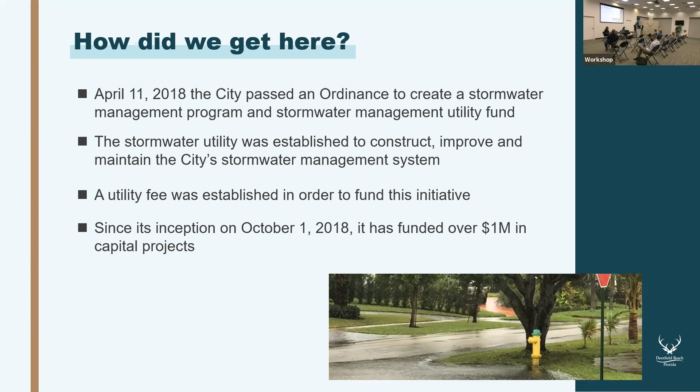The reason that we need a stormwater master plan is just like for any other venture, you need to be able to plan so that you know where you're going. Stormwater infrastructure is complicated. The city of Deerfield Beach has been here a while. So in order to properly plan for the future, make sure that we are maintaining everything the way that it needs to be maintained, prioritize projects for the future, making sure that we have that plan in place and being able to identify those projects is critically important.

There are certain regulations and requirements that the city has to meet as well as part of the stormwater management program, including what's known as a municipal separate storm sewer system. The city is required to maintain a certain amount of its stormwater infrastructure each year, as well as to maintain a specific level of service. That is, it needs to be able to service a certain amount of stormwater and process a certain volume.

In addition, the city of Deerfield Beach participates in the community rating system through the National Flood Insurance Program. The more benefits that the stormwater management system provides, the greater the discount on flood insurance premiums that the residents see. So that's an important piece of this as well. And finally, we want to be able to prioritize the funding available to make sure that we're getting the best bang for our buck.

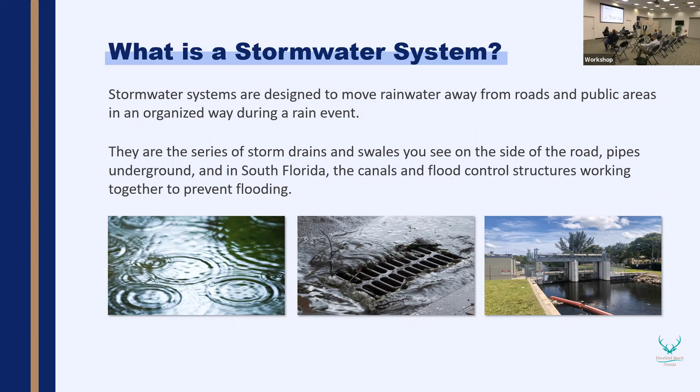So to talk about a stormwater system, it's generally that combination of catch basins, pipes, pumps, canals, outfalls, all of the different elements that you'll see along the side of the road, all of the different water containment structures that work together to help prevent flooding. The stormwater program is really focused on two specific areas. One is flood management and one is water quality improvement. Flood management, as is in the name, is about managing floods and making sure that roads are generally clear for vehicles to be able to pass.

And part of the reason that we're looking at flood management is we want to get the best bang for the buck. So we want to identify what the most cost-effective improvements might be and how we can continue protection of community assets through these investments. From a water quality improvement standpoint, we're targeting the management of our water bodies and identifying green infrastructure opportunities to make sure that all the water that's being diverted from the roadways gets as many contaminants removed as we can, and meets the criteria that we're required to meet per Florida Department of Environmental Protection and the EPA requirements.

Some of the things that we've looked at as part of the stormwater study include all of these different factors that play into the overall model and the behavior that we expect moving forward. Things like sea level rise and topography, the volume of rainfall that we might be expecting, how the land is actually used, whether or not it's pervious or impervious. Obviously, a park does a lot better job at containing water and allowing it to drain than a parking lot will. We'll look at water quality issues. We'll talk about some of the regulations and the environmental impacts that needed to be considered.

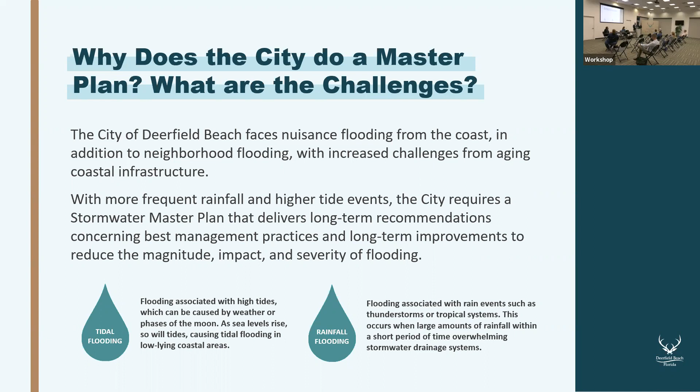Thanks, Michael. A lot of what the plan's about is trying to go from reactive to proactive. In order to have a plan, like a roadmap to the future, knowing what the city has to do to meet its responsibilities for managing stormwater, but also pushing improvements and fixes and addressing some of these issues. So as we get into the master plan, it's really this opportunity to look at the overall stormwater system, but look at its past, present, and future as well. What has happened in the past? Where are some of the issues in the city? What's going on right now that we can assess, but then also look to the future. How can we make things better and work towards better stormwater management in the future?

So this is an evaluation of all the issues related to stormwater. Flooding is the big one people talk about, people see. Water quality, what's going to happen in the future is also important. Since Deerfield Beach drains to the coast, the Hillsboro, Intracoastal, the sea level rise projections are a concern as well. That's an example of what may happen in the future that needs to be planned for. But where this all goes is identifying projects, actions or programmatic recommendations that can all be put into what we call a capital improvement program to provide that roadmap moving forward for the city. So I'm going to spend some time briefly touching all the major elements and giving you a sense for what went into it, the information that we're able to gather and base our recommendations on.

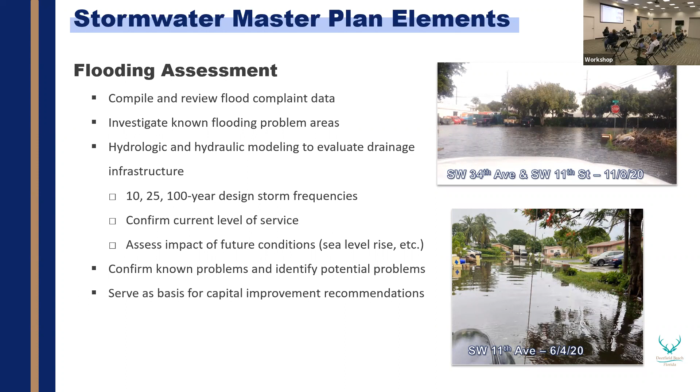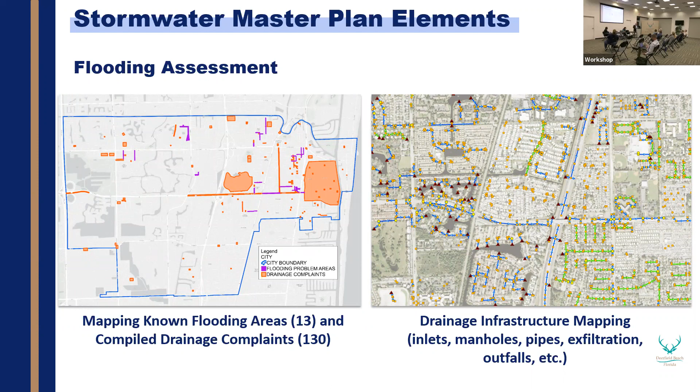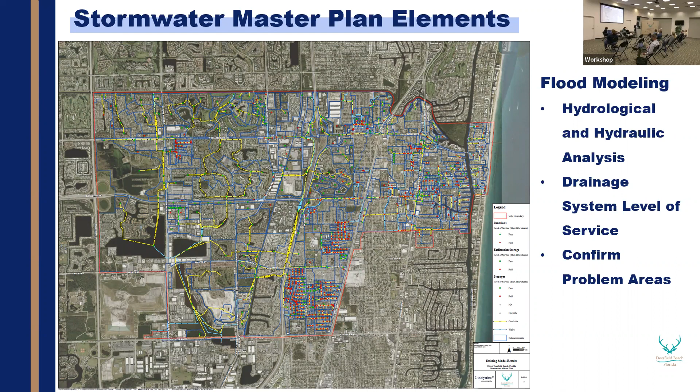Now, as we mentioned, we did this model simulation that's simulating a lot of the inlets and the primary drainage structures, the canals and the lakes within the city and how well they work and how effective they are, in many cases, at getting the water out to the outfalls. As you know, most of the city drains either to the Hillsboro River or the Intracoastal. So this is kind of what it looks like again, a lot of lines and little dots. But we have on this next slide a bit of a zoom in to the District 4 area.

And what we did was we tried to provide some good assessment in these maps of infrastructure that clearly tell a story. And a lot of times we depict this as just boiling it down to dots, green dots and red dots. Green dots mean the infrastructure appears to be meeting its level of service, whereas red dots indicate it appears to not be meeting its level of service. So in some of the areas of District 4, particularly in the Deer Run area, you'll see a concentration of red dots. Those are areas that, based on our analysis, confirmed some of the flooding problems and complaints that we had received. And there's some other little areas.

Not always indicating that there is a problem today, but could be leading to a problem down the road. So even if there's not observed flooding in some of these locations, it's an area to look out for in the future. And if things come to pass, the city knows about it and is able to plan ahead.

Another element aside from flooding is water quality assessment. As rainfall falls on the ground, it picks up a lot of pollutants, oils and metals and greases from the roadways, sometimes nutrients from some areas. And these wash into the storm inlets and they can get into the receiving waters. And so how stormwater may impact water quality in the receiving waters is a concern as well. So during the master plan, this is an effort to holistically look at the city, look at some areas where some stormwater quality issues may be present now or in the future.

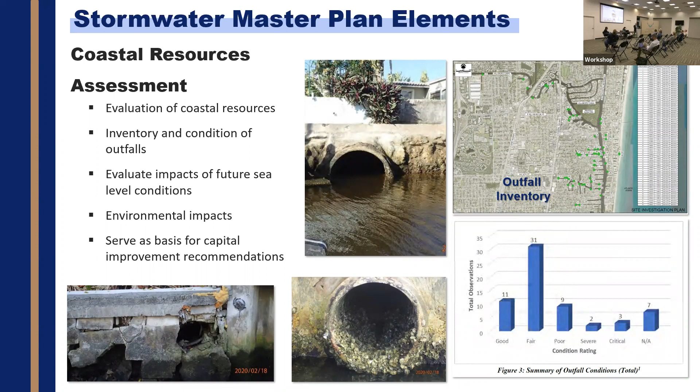Now, we talk a lot of infrastructure and water quality, but a couple other elements that we looked at in the master plan as well really help the city plan for the future. One is a regulatory compliance review. This is an opportunity to look into the comprehensive plan, the local code, the flooding code, and look to see if things are up to date with regard to stormwater management and best representing what the city's needs are moving forward. So we look at that and can provide recommendations for enhancements.

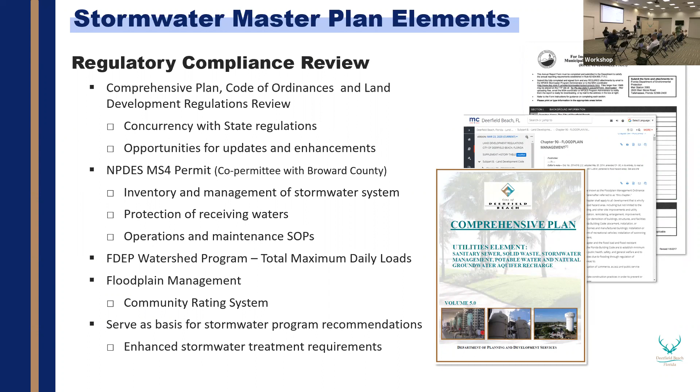We also look at that state NPDES permit that Michael mentioned, which is a requirement of the city to manage its stormwater program in a responsible way. So again, we can look through: are there procedures or enhancements that we've seen through our experience that might be good recommendations to the city? But there's also some water quality regulations. There's floodplain management, and all these can get rolled into the basis of providing some recommendations, and again, some ideas for moving forward with the program to better comply with the needed regulatory issues.

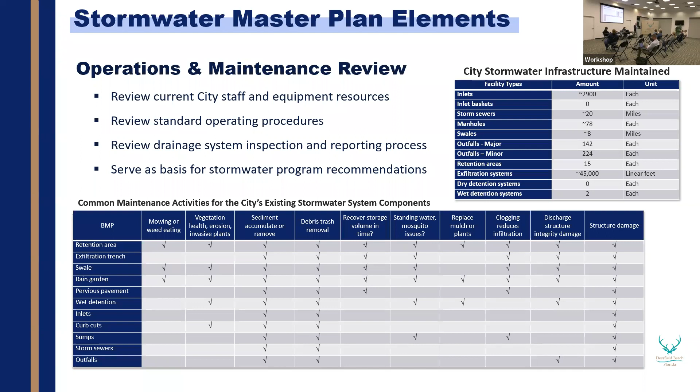So another thing we look at is how well is the city doing in that regard, and are there some recommendations for enhancement, possibly doing some additional things a different way to help the city, again, be proactive in the management of the stormwater system.

So those main 5 elements kind of work themselves together, as I mentioned, into a roadmap, a capital project program. And now this is a list where we pulled together all the recommendations for the various different areas of the master plan, and came together with a list of needs moving forward. And so this table shows flooding projects, shows water quality projects, but also shows some studies, some areas that maybe need to be looked into a little bit deeper. But all told, this is a program of projects that's just a little under $19 million. And so the challenge here is knowing what to do, how to prioritize it, and put it into a program so that the city can go about implementing things in a logical order.

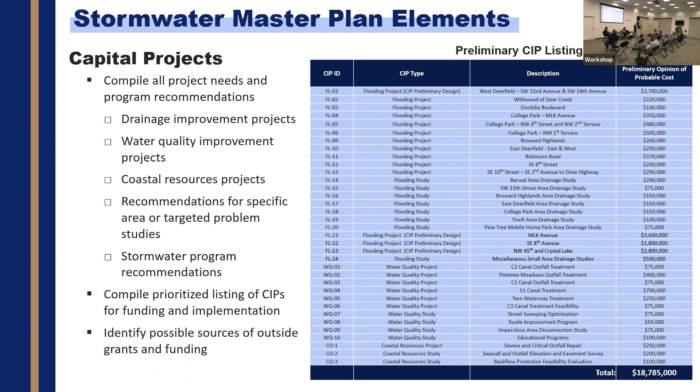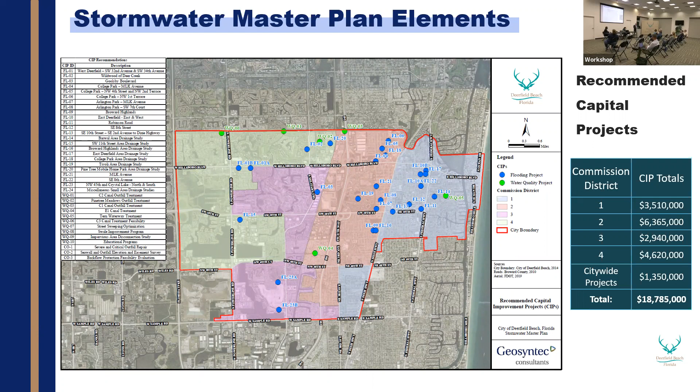The breakdown of that nearly 19 million by district is shown in the table on the right. In District 4, you see about $4.6 million there. There's also some citywide projects that provide benefit to the whole city, and those are enumerated in that table as well. So that gives you a sense of the amount of needs that were identified.

Now, what we do is then answer the question of how are these prioritized? What goes first? That's a lot of money, a lot to spend to improve stormwater. So we put together a 10-year program that puts all these projects together in a priority order and gives the city, again, that roadmap for moving forward. So for example, the flooding projects are prioritized, water quality, the coastal resources, and where this money would be programmed. And we'll say that District 4, the West Deerfield or the Deer Run area, was the top priority project that was identified to hit first. And I'll now shift to talk about that a little bit.

As Priscilla mentioned, the city received FEMA Flood Mitigation Grant funding. That was an opportunity to, beyond what the scope of the master plan is, take 4 priority projects, 1 per district, the next step further into the preliminary design. So in other words, start to get ideas and the improvements down in some plans to be able to flesh them out better as far as the improvements. Again, then be even more attractive to the city trying to bring in funding to help pay for them.

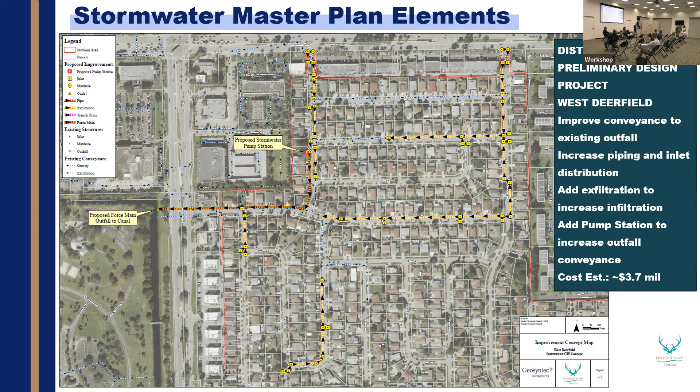If you don't mind going back to our priority list. Of these projects, West Deerfield was identified as the top candidate. As you're aware, the city has received some American Rescue Plan funding, so that is under consideration to see if those funds may be expended towards this project. That's something the city manager and the commission will be evaluating in addition to the numerous other projects and priorities the city has. But this is a top priority for the city. This and Southeast 8th Avenue were identified as the two areas in the city that need a quick response.

So what I can tell you is since the November meeting, we've received viable potential funds that can be used for the future construction of this project. From 30%, we need to do a full 100% construction document to get permitting. The permitting goes through multiple agencies. After we get the permitting, we would need to go through our standard procurement process, especially for a project of this magnitude, to get it competitively bid. And then we would get into construction.

Construction of this magnitude could take upwards of a year or more, especially because it's in a residential area. So essentially what I'm telling you is we're about 2 years out from you seeing true relief from these flood conditions, okay? But it is a top priority for the city, and it is something they are putting funds towards in the near future.

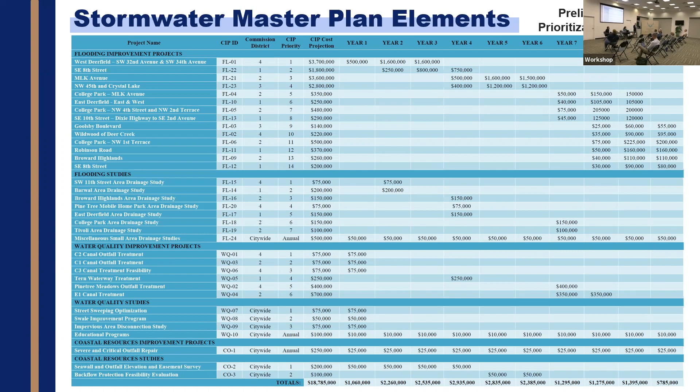To the rescue. Just to elaborate on Priscilla's point, the city manager and I have identified not only Deer Run, but Southeast 8th Ave as the two most critical areas in the city. And semi-recently, the city manager, when we were going to have a rain event, was proactive and had the response team on call. They were ready to go.

It turns out we didn't get the rain that was anticipated, but the response team was ready to go to Deer Run and Southeast 8th Ave because those are the two most critical areas. So we've learned our lesson from before, and we're prepared for the next time. So in that event, while we're preparing and getting this plan put in place, the city does have short-term measures to help that community as well.

Thank you. Hi, I'm Denise Bogner. I have a single family home in Waterford Homes. I was telling Commissioner, coming home Thursday afternoon, I was in the Cove East. There was no rain at all. As I started heading home, it was raining really heavy. I turned from Southwest 10th Street onto Military Trail in front of the Publix shopping center area there, and it was completely flooded.

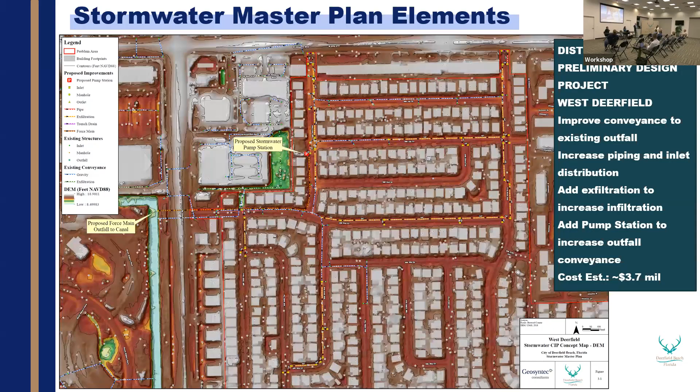Now, my concern is, is that District 4 or District 3? Because when you get over into that crazy area between Century Village and then going down Military Trail to the townhomes and stuff like that, do you know which it would be? Commissioner. This is your geography lesson for the night, but you were coming westbound on Southwest 10th Street and then turned left southbound on Military Trail.

So at that intersection, the southwest corner is District 4. And as you continue south on Military Trail, it continues to be District 4 until Green Road on the west side. The east side, all the townhomes and apartments, that is District 3. Okay, so I guess it's your district. Yeah. Publix is my district, yes. And then that first street coming into our subdivision, going over to Penny's house, that was flooded also. That's all District 4 as well, correct?

Yeah, and now Southwest 10th Street, as you're aware, is a project that is coming. That takes care of the drainage issues that you're seeing at the intersection of Southwest 10th and Military; those improvements will take care of some of those issues in that area.

Yeah, and I was looking to see if we had a red dot there, but I'm not seeing one in that vicinity. Yeah, your maps are hard to read, guys. Yeah, Southwest 10th Street is notorious for quite a few flooding issues. Once you come off of the overpass and you come in near that shopping plaza, that area notoriously is a flooded area. But with the future improvements with 10th Street, they will be required to mitigate for stormwater and ensure that there's no future flooding.

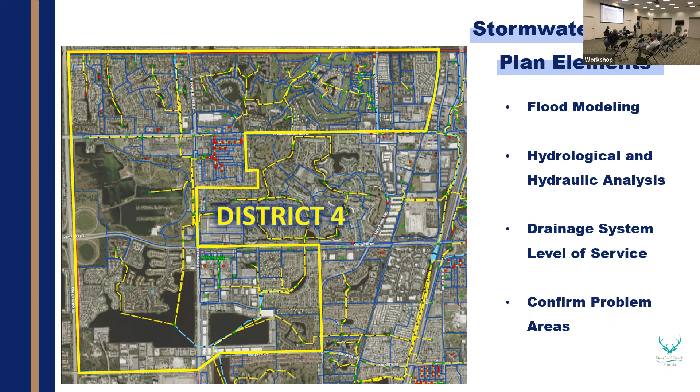Commissioner, do you want to say anything? Oh, put you on the spot. Giving the politician the microphone always is a bad idea.

So, to the residents' point, you remember with Southwest 10th Street the comment cards that they're always asking for at the public meetings. This is the same idea tonight. All of the public feedback and input is what we're looking for to incorporate in the master plan. There's no comment that is too small or no area that's too small to be incorporated. So please make those comments either on the cards in the back or online so they can all get incorporated into the master plan for future considerations. Because it's not just the project tonight, it's all the projects for the 10 years going forward.

The $19 million we don't have in our city budget to do everything at once. So we're going to have to spread this out over roughly a 10-year period, and that's why we have the priority list going forward. Helping us identify what is a priority is why we're having these meetings, for your comments that may move some of the projects up and down based upon the feedback we get. So it's very important. That's why I wasn't overstating at the beginning how important tonight and these subsequent meetings are to the prioritization of the projects going forward. You're all paying for this and you should have input as to what gets done when. So I really appreciate everybody coming out and listening, and you have the contacts to make comments going forward. So thank you.